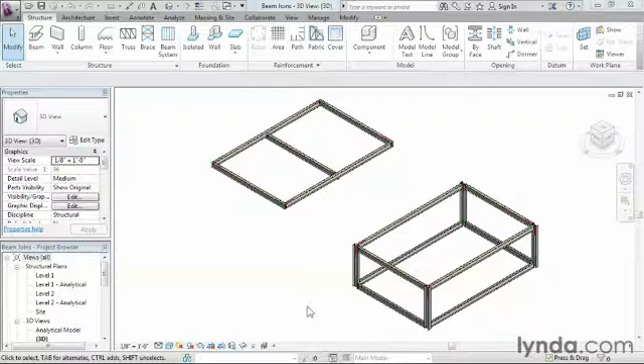In order to do this, let's move to our Level 2 structural plan and zoom in here on the left-hand side. Now, technically, these are kind of flush with one another, and that's okay, but what I'd really like them to do is come together at an angle right here.

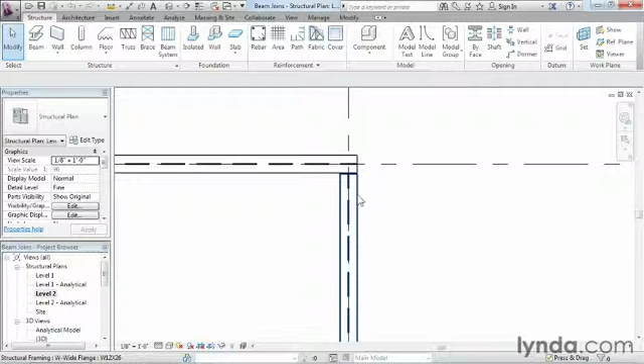In order to achieve that, the first thing we need to do is select on one of these beams. Once we do that, we'll get the Beam Joins tool available to us, and that shows up here. Oftentimes it's just this tiny little icon that looks like two beams coming together. You can see by the little preview button here kind of what it does.

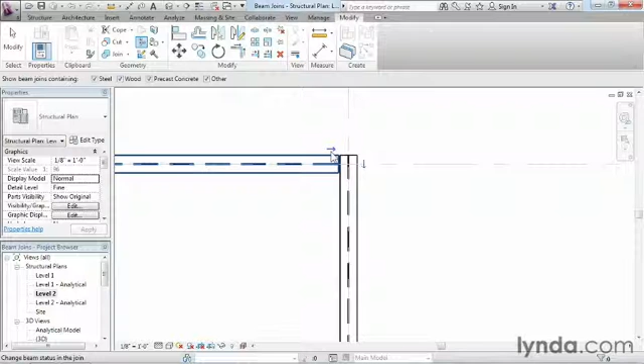If we select on this Beam Joins tool, we'll get these little arrows that show up. If you select on one arrow, it'll bring one back. If we select on another arrow, it'll bring them forward. Now, if I click on this arrow again, you notice how if they're pointing away from each other, it allows them to clean up and come together at a 45-degree angle. This is how I want these to clean up in this particular condition.

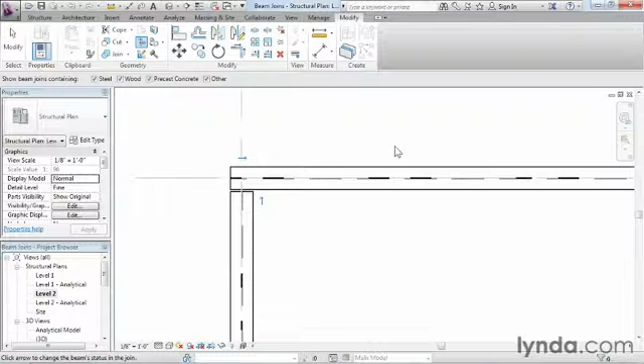So let's take a look at that and try to do it here on the other end. Here I have one arrow going in this direction. Ideally, I'd like to have this arrow pointing opposite from it. You can see when they're pointing opposite directions from one another, it automatically cleans up to this intersection.

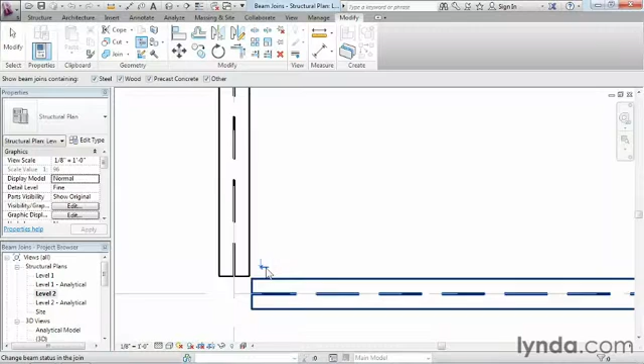So let's go ahead and do that for the next two. It always helps to try to click on the right arrow. If you can get them actually pointing away from each other, or in this case they kind of flipped in or pointing in, it'll end up getting that 45-degree angle there and give you the kind of cleanup you're looking for.

So the point of the Beam Joins tool is that it's going to allow you to adjust the way two beams clean up with one another.